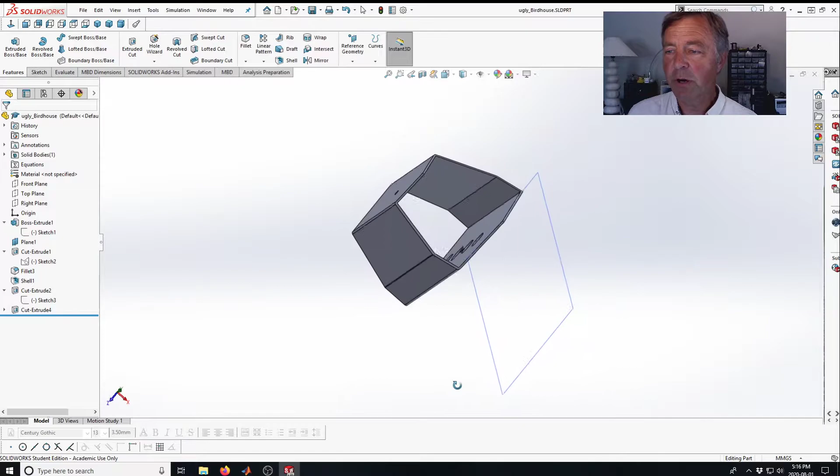You recall where I left off was with this birdhouse that's now a hollow tube with a new perch hole cut through it of the size of a 1/4 inch dowel.

And I've made this funky thing. Well, it doesn't really seem like I've done a whole lot, but there's some stuff now that this will allow us to get to, because the way I was already thinking and how I'd describe this early on, this was going to be made was this thing's going to be cardboard and I'm going to fold it.

Well, you'll find SolidWorks has a bunch of really interesting things you can do. And remember, this is a physical kind of tool used for designing real stuff. So if you look down under the insert, everything's a feature, which is why it's an insert.

One of the things you can look at is inserting sheet metal. So, okay, this isn't going to be sheet metal, it's going to be cardboard, but same idea. I'm going to go to this convert to sheet metal.

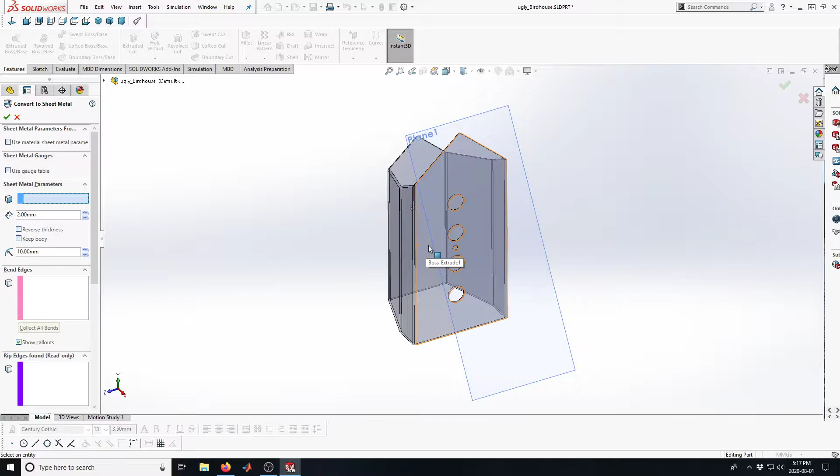And I've already got it set up so it's 2 millimeters thick. I want my base to be there, and I could go and select all the bend edges, but luckily I should be able to do that smart selection.

I'm going to not make the default radius for bends that. I'm going to make that default radius 2.5.

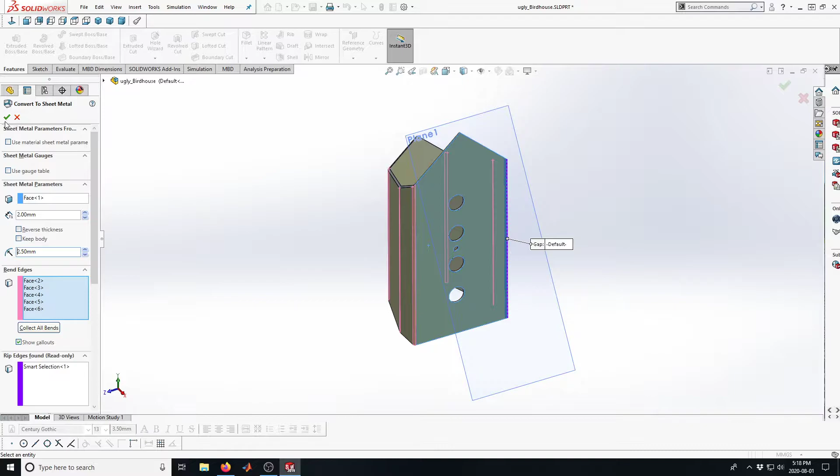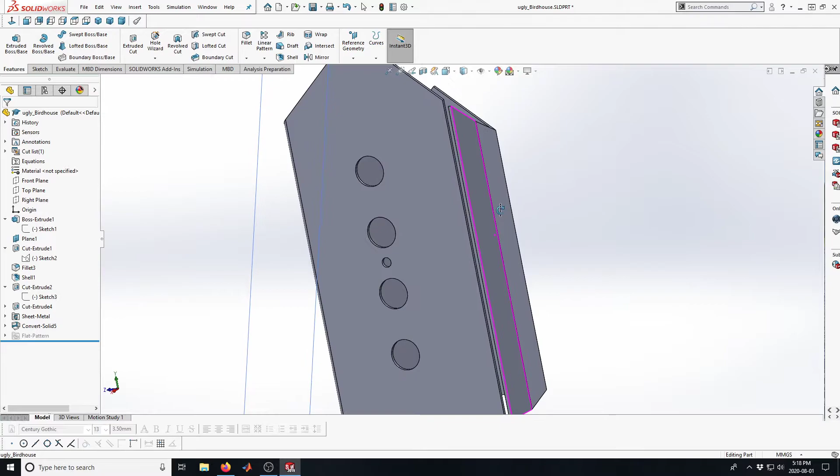There, it did that. So it converted it now. It doesn't look much different. Well, it does a bit. It's got a slice here. But you know, if I make it like that, and I've got that slice, that's going to be kind of ugly. And it's going to be hard to assemble, and it's going to have a slice down the middle.

So I think I'm going to go back to that insert sheet metal, and I'm going to insert an edge flange. If you've ever assembled anything out of cardboard, or looked at a milk carton, or tried to make anything with cardboard and tape, you'll know that having a corner is really handy.

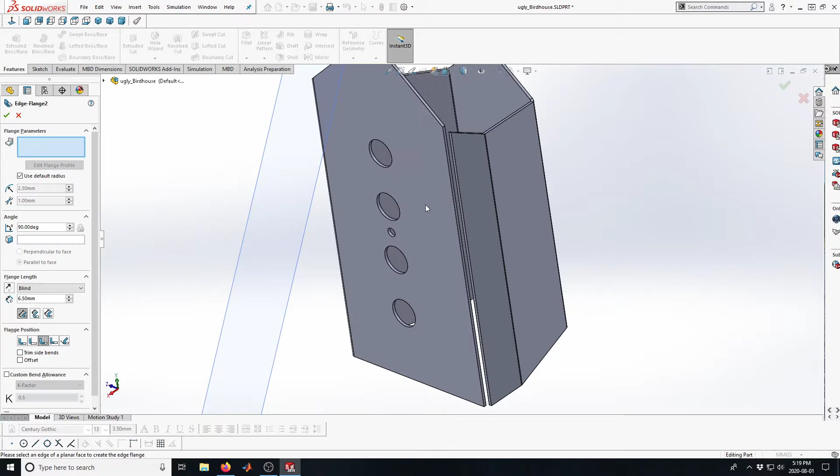So I'm just going to pick edge flange, and it wants to know what edge I want to do this on. I'm going to scroll around there, and I want this edge. And it's going back different ways. I'm going to make this flange nice and big, 23 millimeters back.

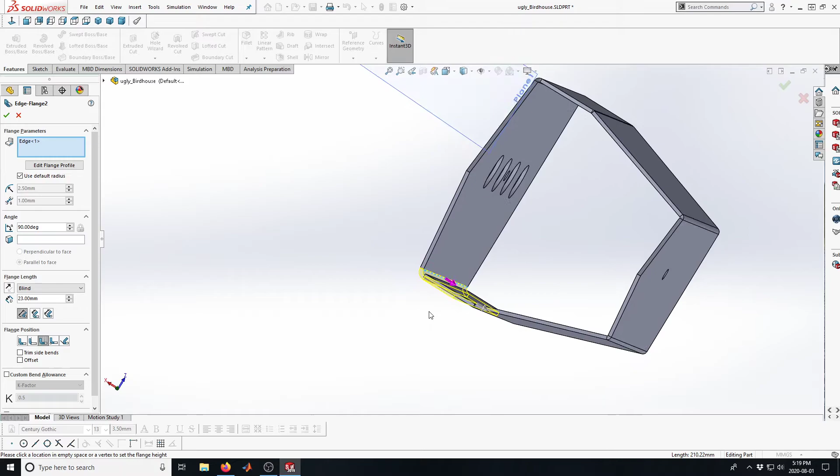And it doesn't look quite right, because it's going to be kind of intersecting the other piece of the cardboard. I could put it on the inside, and then I'll have that ugly edge on the front of my birdhouse. I could put it on the outside, and I can play around with these.

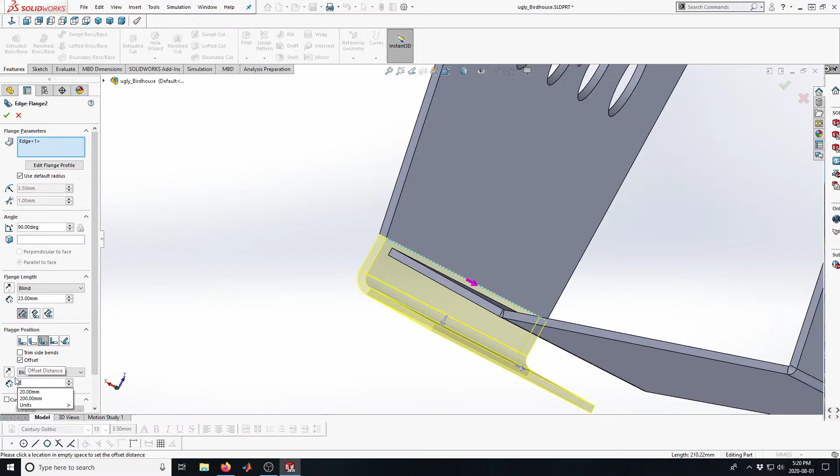I'll make my offset similar to what I want this to be, 2 millimeters. Give it lots of space. So there's the gap in my cardboard. Maybe that's too big, maybe I should make that 1 millimeter.

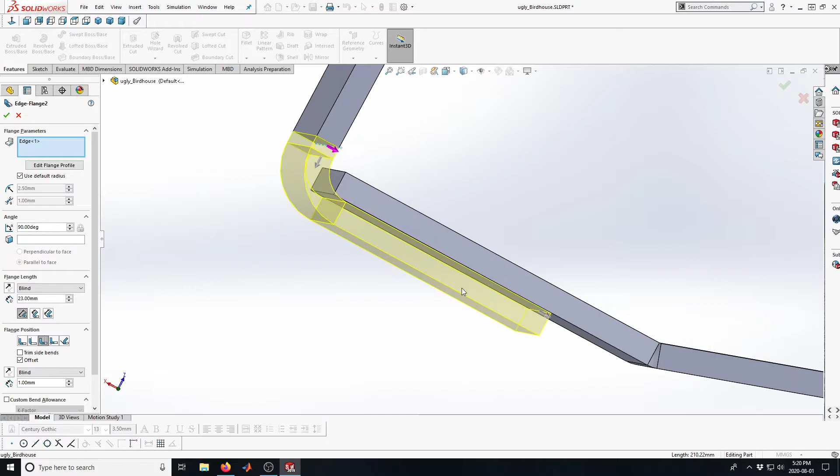How's that look? It looks like it might actually not quite fit. I can play around with that. I'll make it 1.5. Really, this is a tiny little detail that will make no difference. And I'll fill that with glue. So that should work quite nicely.

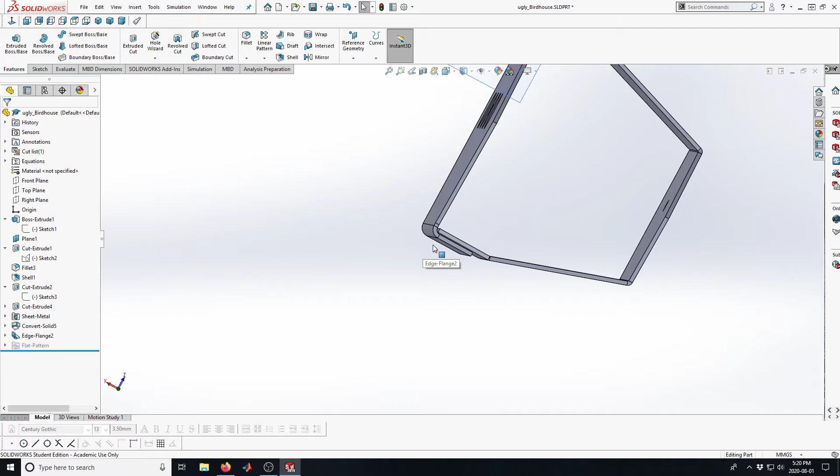And so now I've got this sheet metal thing. It's got a funky tab up here that I'm not really happy with, but I might have to cut that in the end. Maybe I will, maybe I'll try and cut that, but we'll leave it for the moment.

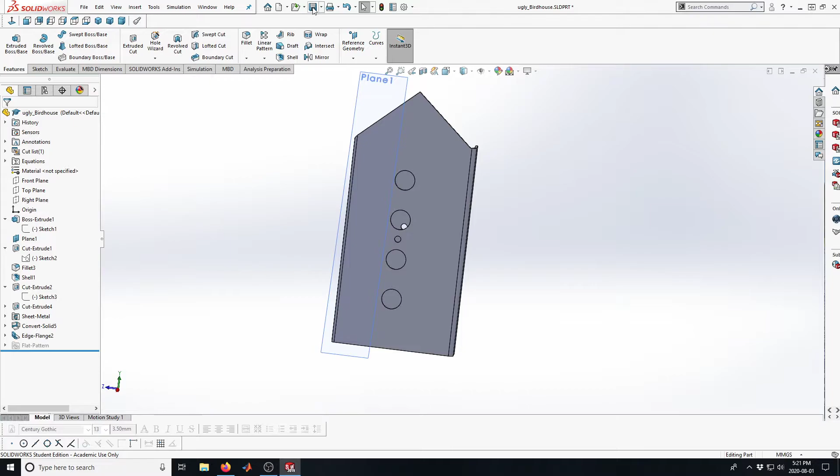So now I can save this, and if I go to Tools, to Insert, Sheet Metal, you'll see that I can unfold this. My fixed face is that. Collect all the bends that are going to be unfolded.

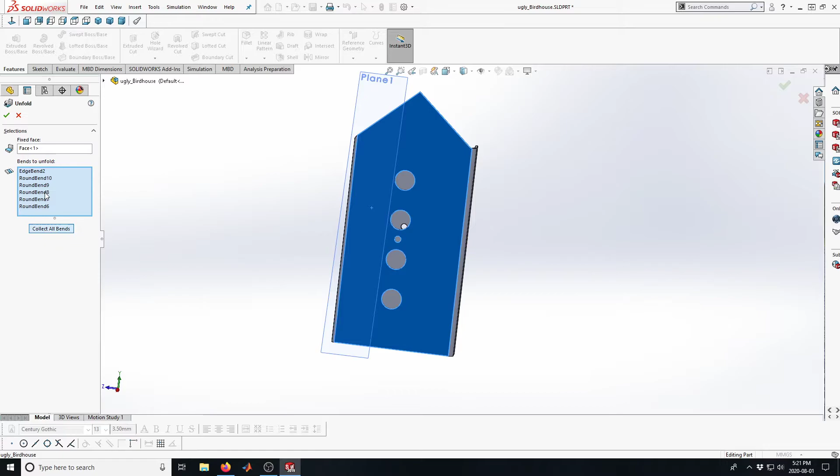And there we have. That's what the cardboard that I'm going to build will look like. Now the value here is that I can take this piece to a laser cutter and exactly cut this profile so that my part is really easy to make really precisely. And I can fold it around, glue it together, and Bob's your uncle, it'll be a really nice vertical piece.

For a birdhouse, I could make it out of cardboard, as I kind of intended for a prototype. I could make it out of plexiglass, because that's easily bent with a bit of heat. I could make it out of sheet metal, so I could make a cool galvanized, high-tech looking birdhouse. Whatever. If it were in sheet metal, then I would be spot welding these bits to this after it's bent, and that would be great.

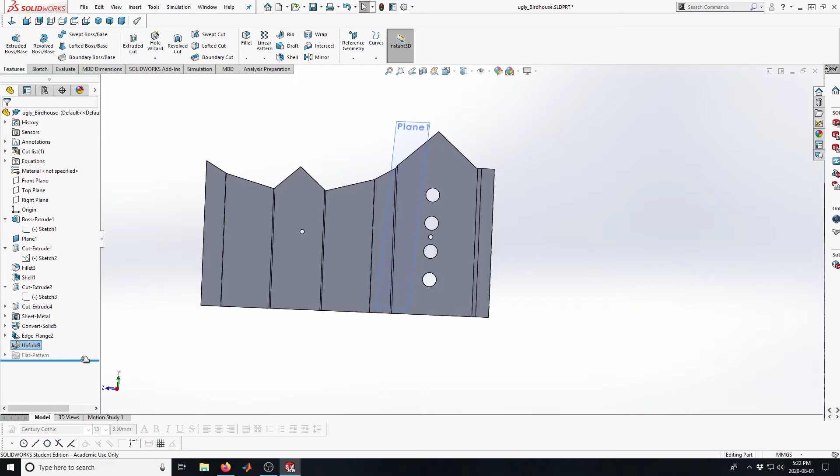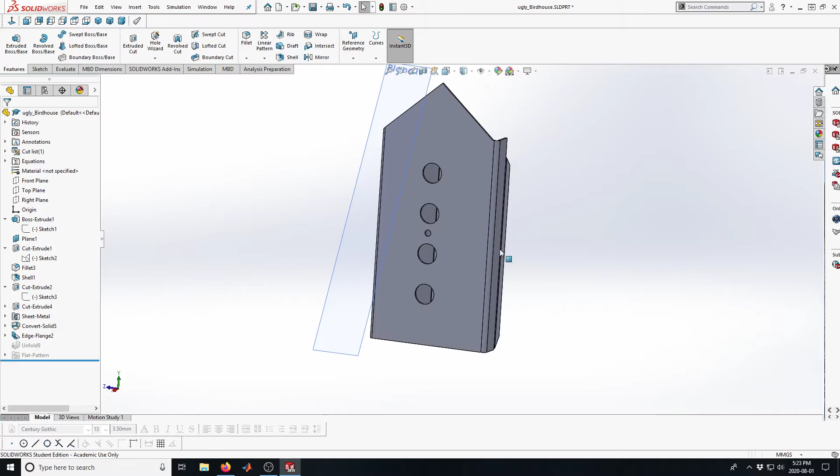So I've got this now in a state where it's beginning to look like an actual part. So I'm just going to roll back up there. I can do that. Actually, I think what I'll do is I'll suppress that. That's always a handy way to take something you don't want to have evident and just keep it from getting in the way. So now I have this part just like it's going to look.

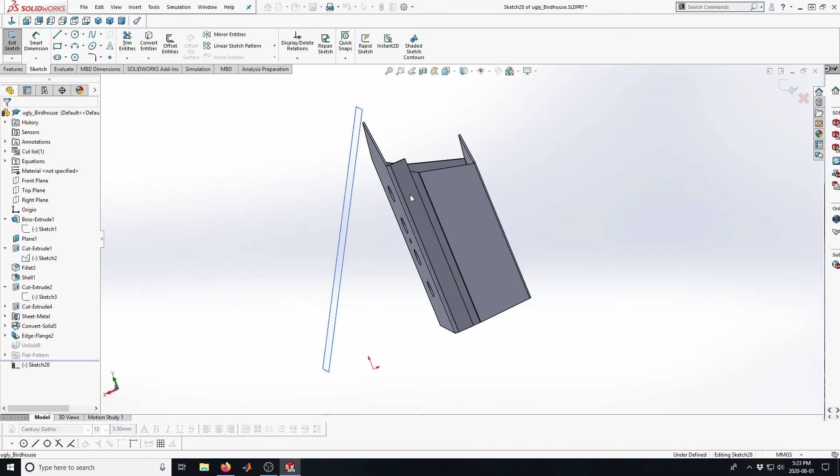Maybe I'm going to cut this because I really don't want that tab up in that corner sticking up. So I'm just going to make an extruded cut here, go there, and I'm going to convert that line, and I'll draw a line up and over and down.

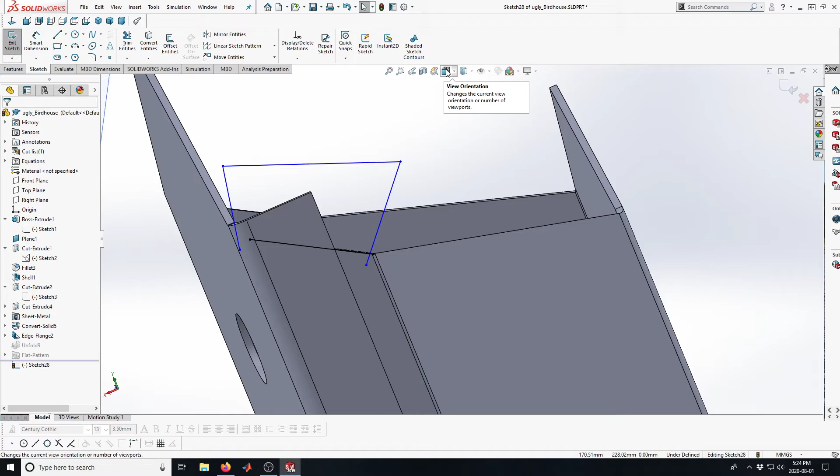Now, one of the things that's sometimes difficult is if you can't really see what view you're in, well, this view tool lets you go and you'll see where to go. You can be normal to your sketch plane, and so that's a bit easier to see.

I'm going to trim that. I'm going to extend that. And then I'm going to trim that. That ought to do the trick.

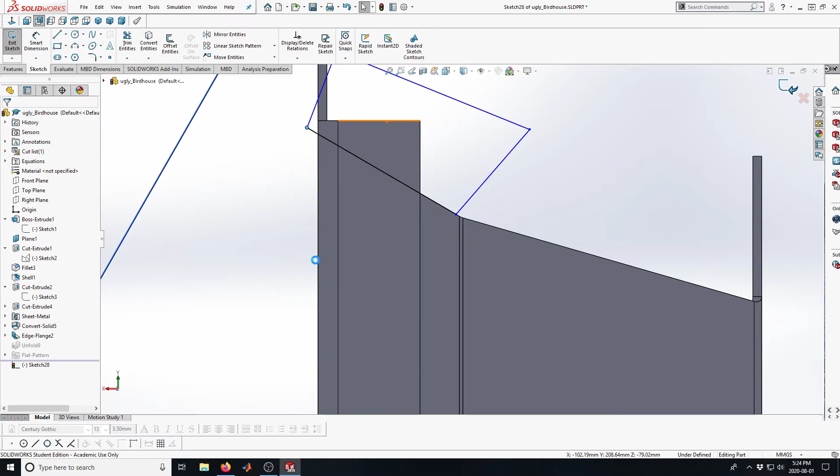And enough of this. Now how deep will I cut it? I think I want to cut it from the sketch plane. I can go Up To Vertex and I can pick that vertex. So I can just cut that right to there. Boom.

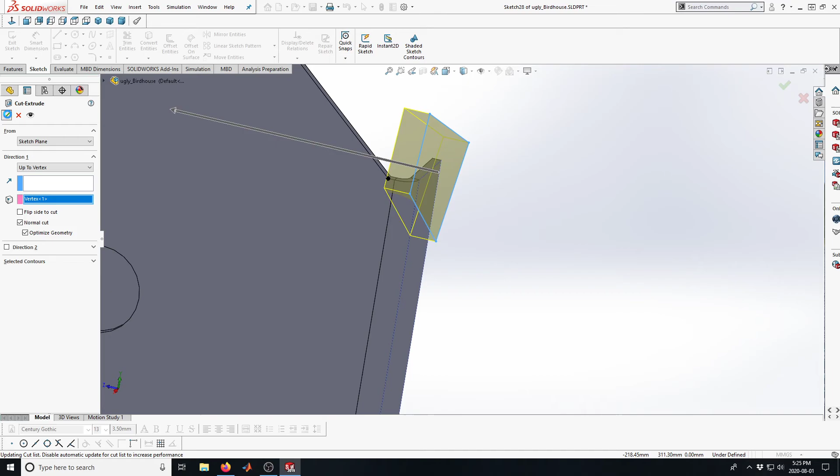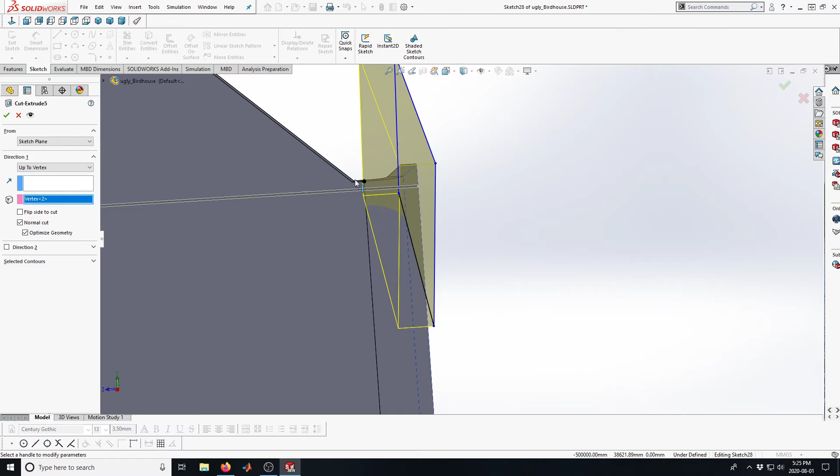So now that might not be the best. Maybe I should have cut that less. Yeah, we'll edit that. Maybe I want to cut it up to vertex. I don't want to pick that vertex, I'll pick that one. See what that does. Yeah, it's still kind of a funky cut there. Something weird's happening with that.

It's funny because I have these curves, and when you get right down to making it, these are so tiny that they're minuscule and not much of a worry. When you start doing CAD stuff, everything has to be ridiculously right.

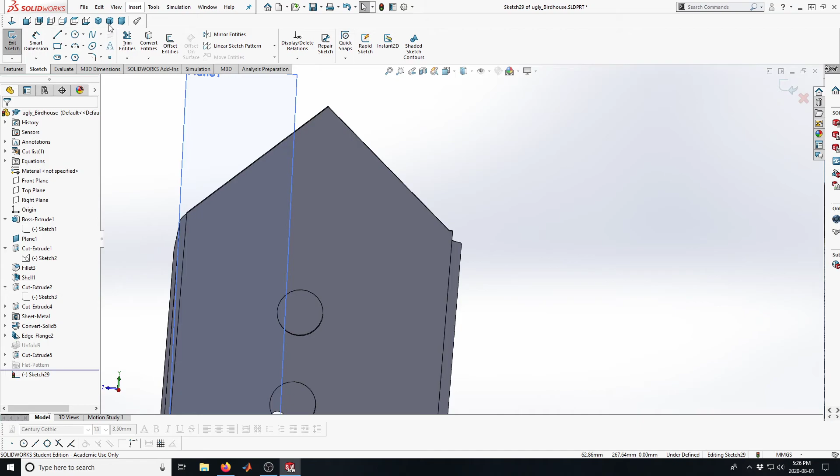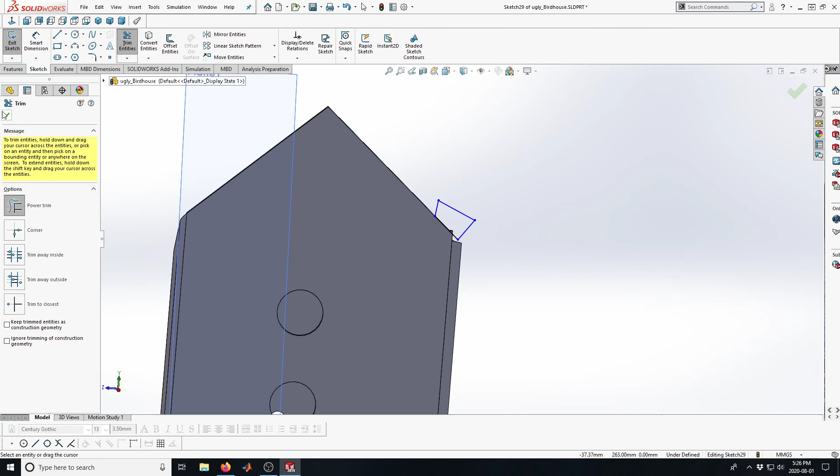So I'm just going to make another cut. I'm going to convert that line. And I'm going to go from there to there to there to there. All of these things are quick and dirty, not the best practice, because if I make any changes at all, a lot of these things won't be changed. But sometimes quick and dirty is not so bad.

There. So I cut that tab off. And that should still work just fine for me.

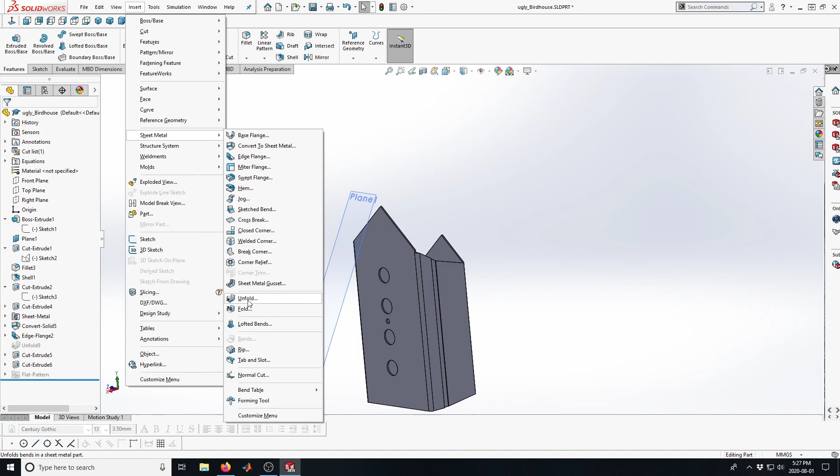Now if I go back up to Insert, Sheet Metal Unfold, wonder if it'll still unfold for me. Fixed face that, collect all bends, and it still does. And this time it does it without that funky tab on the corner. So that'll be good. Now, this part, as it's unfolded, is the part that I will send to the laser cutter. So we'll talk about that in the next video. Talk to you soon.